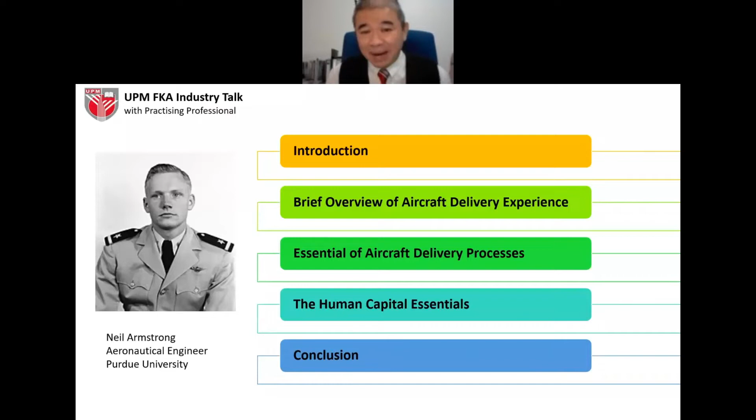So aerospace engineers like you and me, please have confidence, grow your skills, grow your knowledge, and then you will be very useful actually to the development and growth of the world, especially in today's talk, who can actually manage the delivery of the aircraft project for an airline, even for my company. I did the management of the aircraft project that we actually spent hundreds of millions to bring back the airplane.

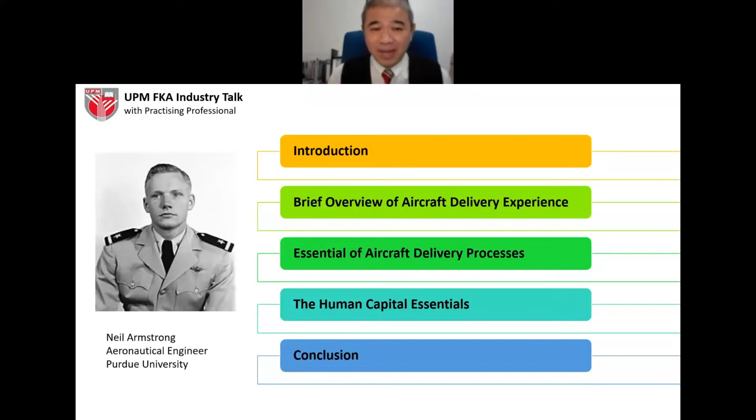Okay, now a brief introduction of myself here. I actually started my career in Malaysia Airlines. In 1989, I left Form 6, and I was studying in MBS KL. In 1989, I was doing science stream, but I stopped to join Malaysia Airlines. Now, Malaysia Airlines is a place where the aircraft engineering and maintenance is there.

It's part of the aerospace ecosystem in Malaysia, and I joined as a trainee artisan. Now, trainee artisan means somebody who worked with hands, somebody who use your hands to work on the technical part of the airplane. For example, our hand skills are good in removing parts, in dismantling components, in working on the aircraft. Our hands are trained to be like that.

So it was 3 years of training in 1989, starting from 1989. Of course, it was even getting into MAS to be a trainee artisan. I think just the application alone, a few gunny sacks full, thousands and thousands of people applied, and out of these thousands and thousands of people, only 24 were chosen. Only 24 were chosen to be trained as an artisan. So nowadays they call it a technician.

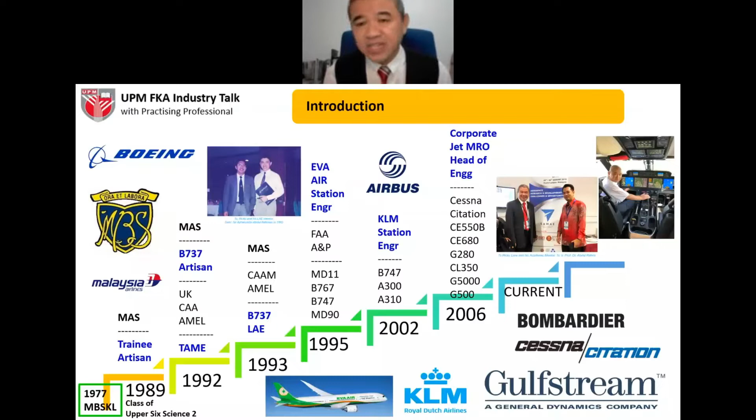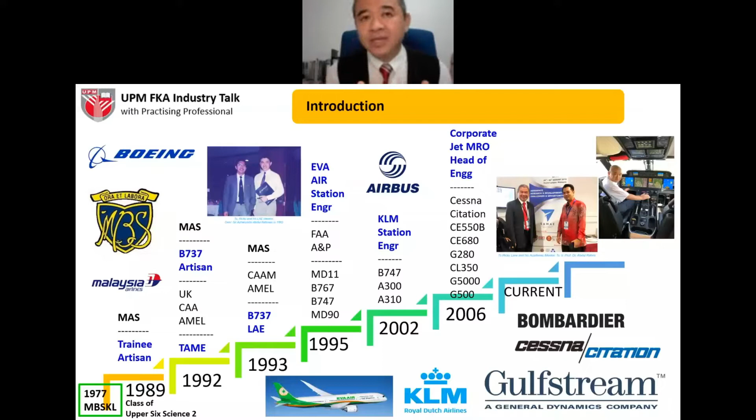And I'm actually very fortunate to have Professor Engineer Technologist Dr. Abdul Rahim as my mentor. I like to put him as my academic mentor, who has guided me on how to come into the academic world from the industry, and also how to contribute back to the academic world and to the engineering fraternity. So I'm very thankful to Dr. Rahim, and it is where I am now until today, continuing my love, my passion in the aerospace and aircraft engineering. So that is actually my very basic background.

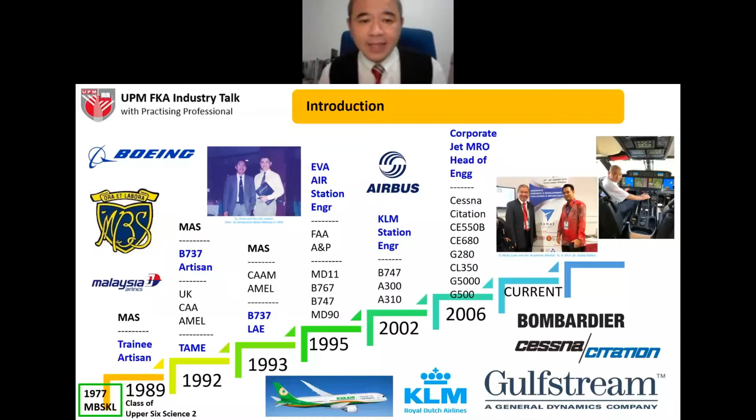Probably I'll share a little bit - this is the most recent delivery that I took, and this is actually the 12th aircraft. Since I started my career in aircraft engineering, this is the 12th aircraft that I took delivery of, and this happened just about 2 months ago.

In this project, I was actually designated as an aircraft acceptance and flight engineer. What is aircraft acceptance? I have to do all the due diligence process as an engineer, and then accept the airplane - I have to sign documents and accept the airplane.

But don't you think there's something missing here? Can anybody guess what is missing here? Isn't it the pilots who are usually the center of attention, and they go and fly the airplane, they accept the plane? Isn't it supposed to be that way?

No, it is actually the engineers. So even though the pilots have a lot of publicity, the key person in the aerospace company, in the airline, in a flying aircraft, operational airplane, especially when purchasing the airplane, it is still the engineers. The engineers know the detail design, the specification of the airplane, how the airplane has been certified. The engineers understand it in detail, not so much the pilot. The pilot just operates the aircraft - they can operate it and feel, oh, this is how the airplane behaves. But as far as the design, structure, propulsion system, avionics system, only the engineers will know in detail.

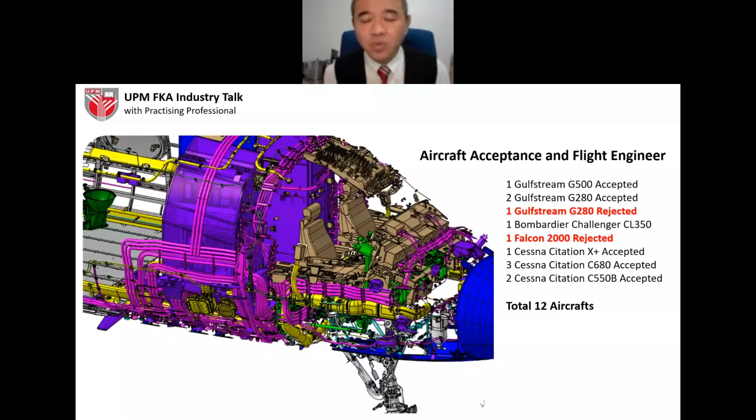I also took 1 Citation X Plus — the fastest business jet in the world is actually the Citation X Plus — and I accepted it. Plus 3 Cessna Citation Sovereign 680s, and 2 Citation Bravos. So in total, 12 aircraft where I was the acceptance engineer and the flight engineer.

Now, if you really want to be part of this kind of project, you have to continue to grow your passion. Because why am I selected, and why not other people selected?

Why? I don't own the company. It was a call to me, Ricky, we have a meeting, let's come into the project room, and then we're going to discuss. It was chosen, and there must be a good reason for them to choose you. For the senior management, the board of directors, to mention the name and choose you to lead the project in engineering.

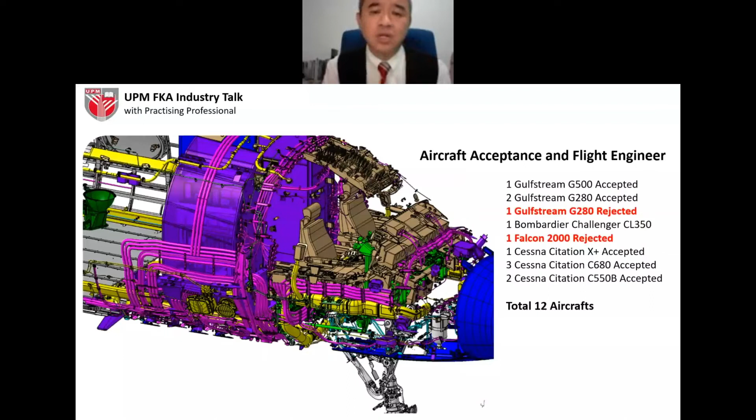Now, many engineers, probably out of 20 or 30, maybe one will be chosen to be involved in the aircraft delivery process. So actually, not many engineers got the opportunity to get involved in the aircraft delivery process. But I'm going to share with you here the 7 basic steps, the essential processes where an aircraft delivery will take place.

Number 1, it always starts off with the aircraft acquisition project by the company. Now, because these airplanes are very expensive and very complex, to actually purchase an airplane is not like going out to the Proton shop or the Toyota shop, bringing money, looking at the car, liking the color, paying the down payment, and then 2 weeks later your car comes.

Not for the airplane. Any airplane, whether it's an airlines airplane or a business jet, it is actually a very complex process. So you need to have it as a project. You cannot say one person decides, okay Ricky, you just make the decision, or the CEO, you just make the decision. Cannot be like that, it's very complex. Otherwise you get into trouble, you get sued in court, you can't even get your plane, your down payment deposit cannot get back. All kinds of problems. That's why we call it an aircraft acquisition project.

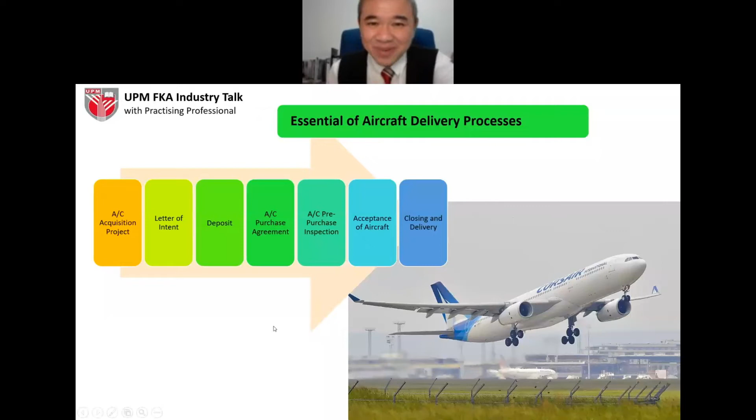Okay, up to here, any questions from the students? No? It's a very interesting process. Okay, let me go to the next slide.

Now, let me share with you during my delivery process, there were 3 out of 10 accepted airplanes, accepted flights, where there were 3 cases where, even though it is a new airplane, the new airplane experienced issues. Many of you think, oh this is a new car, everything will be okay, right? Most of the time, 99%, if we buy a new car, for something to fail on the car while driving it back home is very, very unlikely.

Very, very unlikely. Why? Because a car system is actually much less complicated than the aircraft, very much less complicated. So in my process, I was involved in 3 incidents.

Two incidents actually involved sensor failure on the aircraft's air cycle system, where I had a pressurization loss in flight. We were involved in grounding the airplane at the Pacific, on the islands in the Pacific Ocean.

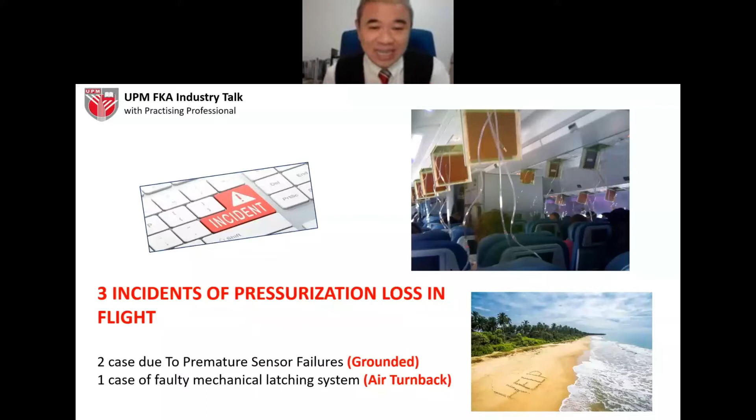Okay, now who are the people involved in the engineering process, who are involved in the aircraft delivery process? Yeah, people like you, people like me.

Now let's talk about aerospace engineers, people like you who may be joining the aerospace industry, people who are expert in aircraft systems. I'm talking about aerospace and space engineers. Aerospace engineer, you must be good at systems, you may be good in structures, you may be good in avionics.

Sometimes you are also part of the CAMO team. CAMO means continuing airworthiness management organization. Usually, these CAMO are approved and part of the airline, or an independent approved CAMO organization.

If the aerospace engineer is in these systems, usually these are the people who will be on the selection list to be part of the aircraft delivery team.

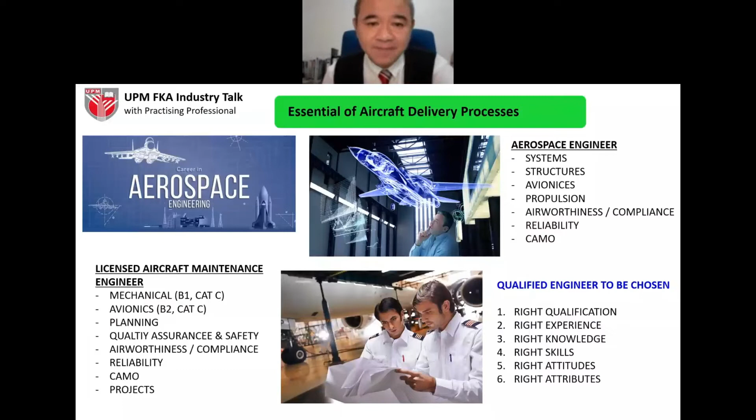Okay, now the first process, the acquisition project. This aircraft acquisition project is usually led by the CEO, or sometimes a managing director. He is the center that will be calling for the stakeholders to form a project team, the initial acquisition project team.

Now, this team, the CEO will invite people from several parties. Number one, he might invite people from the board, from the board of directors of the company, business development directors, for the expansion of the company, the expansion of the fleet, the expansion of the destinations of the flight of the airline. They will also invite the flight operations director.

The flight operations director, why? Because they are the people who will do the flight planning, and also they are the people who will actually operate the airplane. The next one is actually the government stakeholders.

Why is the government a stakeholder here? Some of the airlines are partially government owned. Like some of our airlines in Malaysia are owned by Khazanah. So if you want to buy a new airplane, Khazanah has to come in.

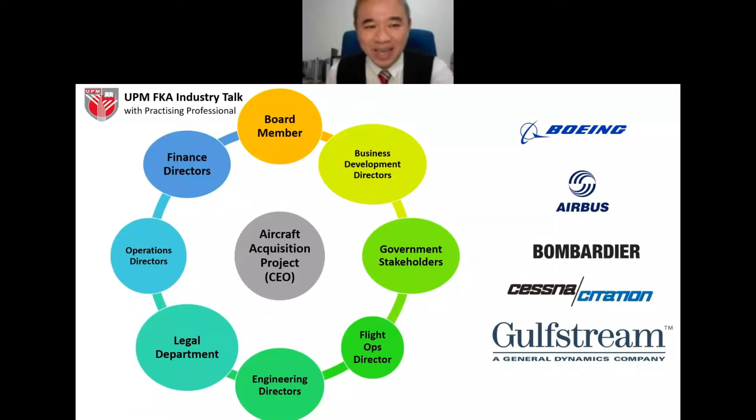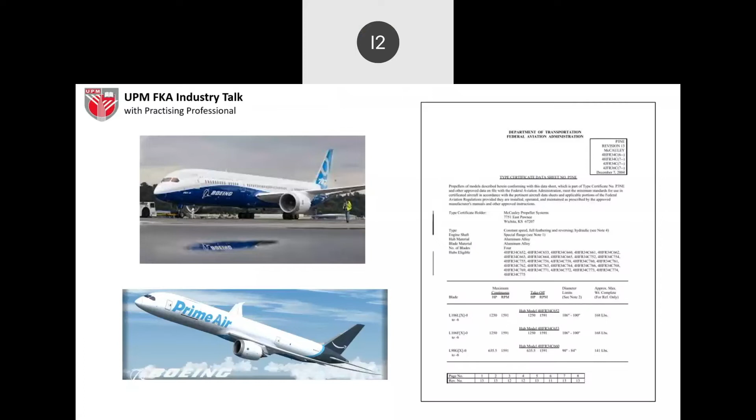Is it because one is a passenger aircraft and the other one is a cargo aircraft? Yes, one is a passenger airplane and one is a cargo airplane. The project team has to decide what type of airplane they want to purchase for their business expansion. Do we want to buy a passenger airplane or do we want to buy a freighter, a cargo airplane?

So this is a very important decision they have to make, because buying a passenger airplane is much more complex than buying a cargo airplane. You're talking about the entertainment system, the comfort, the seating layout, first class, business class, economy class, super economy class, all these things become very complex. So it affects a lot of options, a lot of decisions the management project team will have to make. However, if you were to buy a cargo aircraft, a freighter airplane, you don't have to concern yourself so much about these things. So this is a huge decision.

Are we going to buy a freighter or are we going to buy a passenger airplane? Each of it has a different path, different complexity. Okay, so that is the first thing that they have to do.

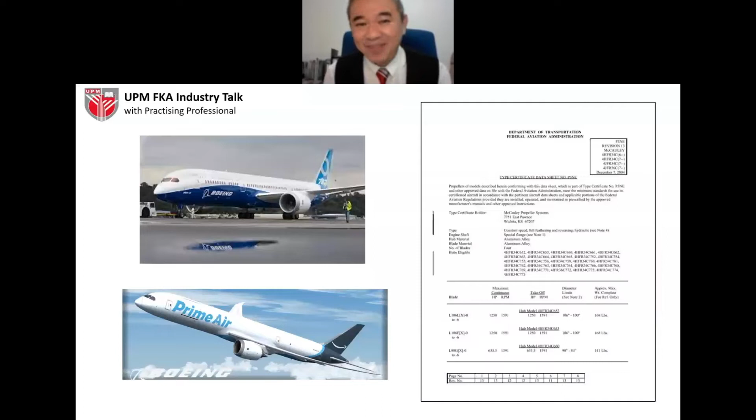Remember, first you have the project. The project has decided you're going to buy a passenger airplane, and then you're going to express your intent. We have to communicate with Boeing. At Boeing, our project team has reviewed through many meetings, and we have decided the next airplane that we want to purchase for the expansion of our business is the 787.

We, the CEO or the delegated person, will issue a letter of intent to the aircraft manufacturer. You must express the intention: we intend to purchase 10 Boeing 787s with this passenger configuration. We have reviewed the technical specification, and it matches with our business objective. And we are expressing here that we would like to purchase the airplane.

Now, once the letter of intent is signed and sent to the aircraft manufacturer, Boeing's sales department will respond to you and say that the letter of intent has been received, your comments and inputs have been accepted and acknowledged, and therefore to proceed further to the next stage.

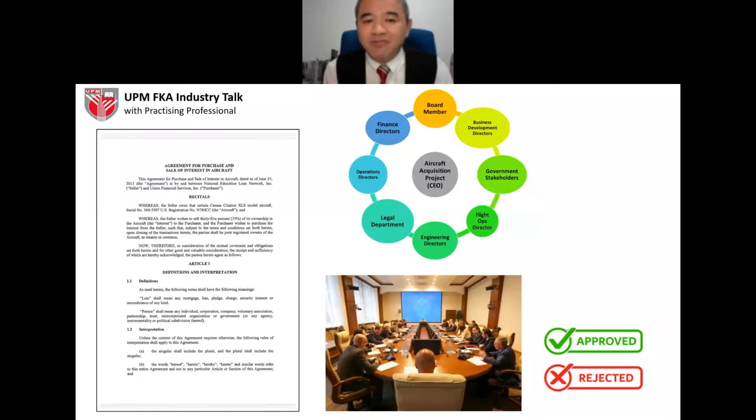So the sales and purchase agreement contents will be reviewed by all the members here in detail. Sometimes it takes a very long time, and each party in this project team will actually accept or reject the contents of the agreement. The aircraft manufacturer's legal side will actually adjust or write the agreement biased towards the aircraft manufacturer. So many times, the owner or the airline's lawyers have to rebut or counter the agreement terms, and it actually can be done.

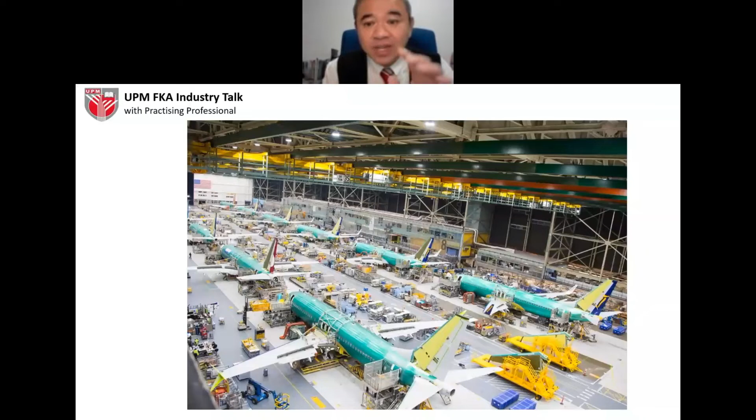Now pre-purchase inspection is a very crucial stage. That means from the manufacturer side, the aircraft will be produced, but from the airline side, as part of the agreement, they will send inspectors. These inspectors are usually engineers who actually go to Boeing and probably stay there 6 months, 8 months, or 1 year, sometimes 2 years, depending on the complexity of the agreement.

Now, pre-purchase inspection covers 2 areas. Number 1 is the production inspection. Production inspection means when they do the assembling of the airplane, when they put on the skin, when they put on the structure, when they install the air pressurization components, when they put in the engine, there are people there from the owner or airline side to actually inspect it, to make sure it is in compliance during the assembly. So that is what we call production inspection. These engineers are usually aircraft maintenance engineers or aerospace engineers who go.

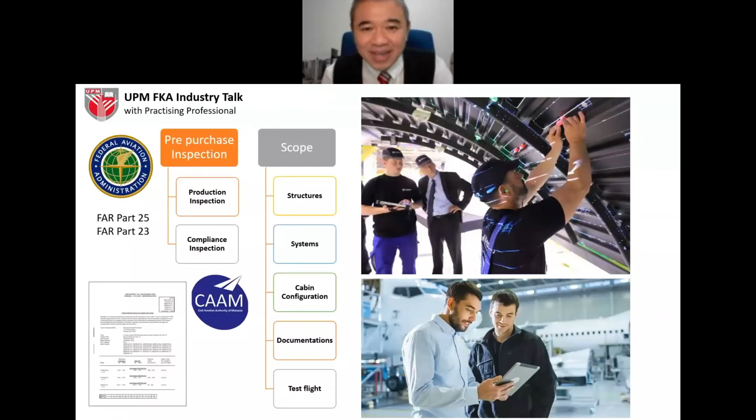This is a Boeing production facility. It is very, very, very huge. It is so huge that sometimes they have to use an electric bike or bicycle to move around the production plant. This is actually part of this Boeing production plant in the US.

Now I want to touch a bit on this one because to me, you are at the stage of becoming an engineer. You are attending your courses, doing your degree program now.

The human capital essentials mean we need people who are more than just degree holders. We cannot say, oh you're a degree holder, therefore you can be part of this team. No. To be part of the technical services engineer, quality assurance engineer, licensed aircraft engineer, or tool and equipment team for the new airplane you're purchasing, we have to have engineers chosen specifically to make sure they have the right qualification, aerospace background, right experience. You have to have been working on the floor before.

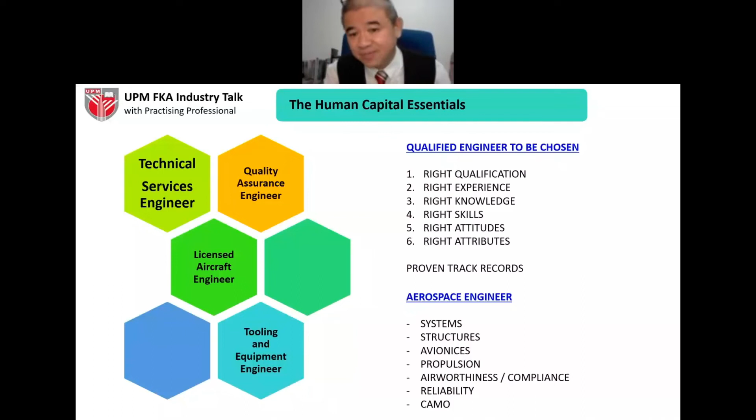The university is training you. You have the ground now, so you have the right attitude, right attributes, continuous learning. These are the human capital essentials that we need to have as an engineer to eventually get involved in the aircraft delivery process - the aerospace engineer I've mentioned already.

Now let's talk about the test flight and the team. We'll be very surprised when we go to the airplane. We thought the pilots will have all the experience - captain so and so has 20 years or 15,000 hours, thousands and thousands of hours. You feel that they understand the airplane more because they are captain so and so.

Actually, no. You will realize that as an engineer part of the test flight team, many times the pilot will come back and ask the engineers, hey, when I roll the airplane, I felt there's a vibration every time I bank maybe 3 or 10 degrees, why is it so? Then you go to the wing, look at the aileron, the rudder, and you'll be able to explain the reason for the vibration, 1, 2, 3, 4. So the next thing is if you were to roll, you have to make sure you trim the airplane at a certain angle. These are the inputs, the feedback that engineers can give.

So a test flight must be done with the engineers always there. As an engineer, we are there to monitor all the parameters. We sit in the cockpit and check whether the parameters, the design specification, are within the aircraft type data sheet.

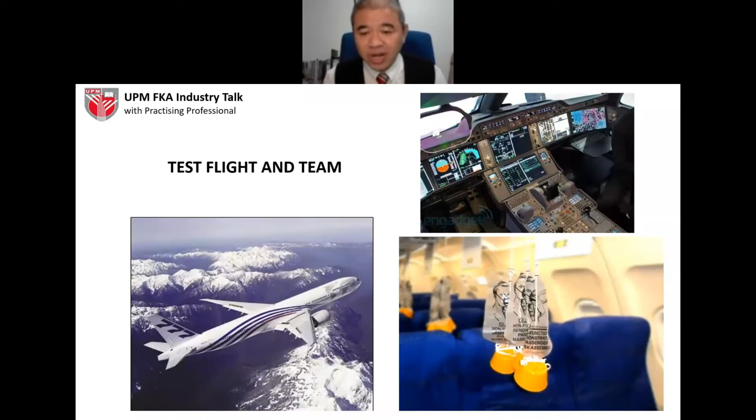Why? Because the engineers' report, they have to take it seriously. I received a call from Malaysia telling me to make sure we inspect and check what actually went wrong that caused this. This happened during part of the test flight. If we do not have strong knowledge and understanding of the aircraft system, we can never do that. People will never listen to us.

So this is also part of the checks we need to do during the test flight - the cabin check, the galley. The galley means the kitchen, where they cook the food and make the coffee. All the equipment, compartments, and switches must be working - the coffee maker, the entertainment system must be good, clear, no noise. You also do a comfort check - how you actually feel with the lightings, whether the lighting is done well, no flaw, no vibration noise or annoying noise in the cabin. All these things I actually check during the test flight.

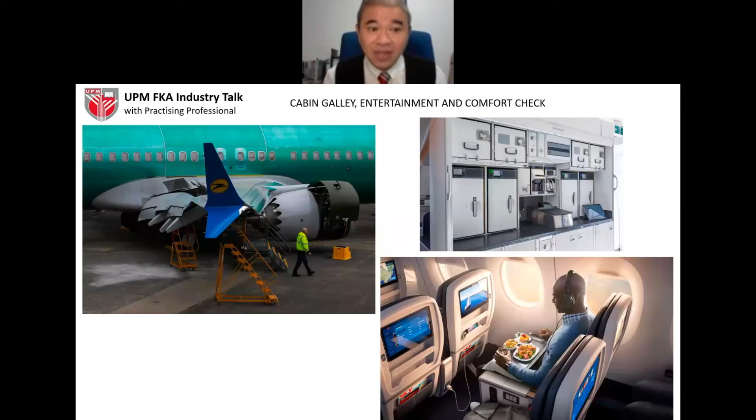And for engineers like us, we will extend the flap, deploy the engine, deploy the thrust reverser, open up the cowling, and then check very, very carefully. Even though there's no report, we will open up and check. Engineers are involved in this kind of activities.

And if all of this passes, everything is passed, then we will do acceptance of the airplane officially. That means the engineers, or sometimes a designated person who can sign the acceptance of the airplane, will be designated. Sometimes it's engineers, sometimes it could be the pilot, sometimes it will be a senior member of the company. Once they sign that, it means the aircraft is accepted.

And once the aircraft is accepted, they have to make the remaining payment of the airplane, depending on the negotiations of the financial part of the agreement. Sometimes they might pay phase by phase, sometimes they might accept the full payment at the end, after the acceptance of the aircraft has been signed, and then they will deliver the full payment.

Yeah, and after they have received the full payment, the next process is the closing and delivery ceremony. Of course, usually this closing ceremony for the airline is also a publicity event for the airline, so they use this as a marketing promotional material. They will have a cake cutting ceremony, a flyer, a banner, and then they'll put it in the news that they are taking delivery of the 787 or the A380. All this at the closing ceremony.